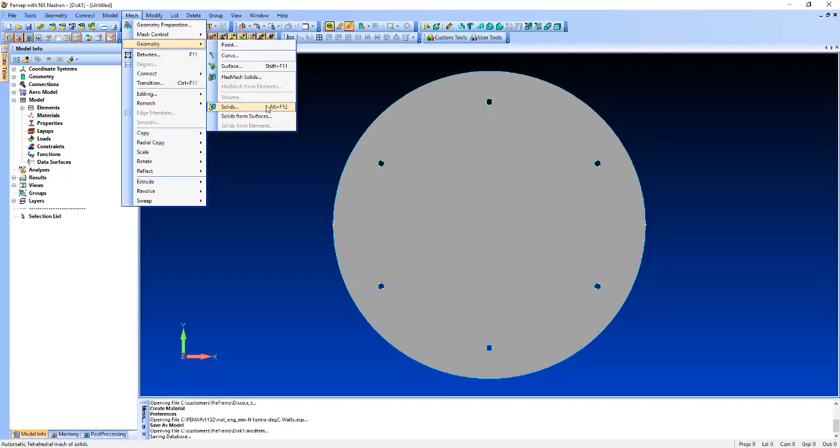First thing we need to do is just mesh this part. And let's just do mesh solids. I'm not sure what material. I'm just going to make it out of aluminum. You can obviously use whatever material you want. I'm going to tighten up the mesh sizing around the holes because we do have those little tiny holes.

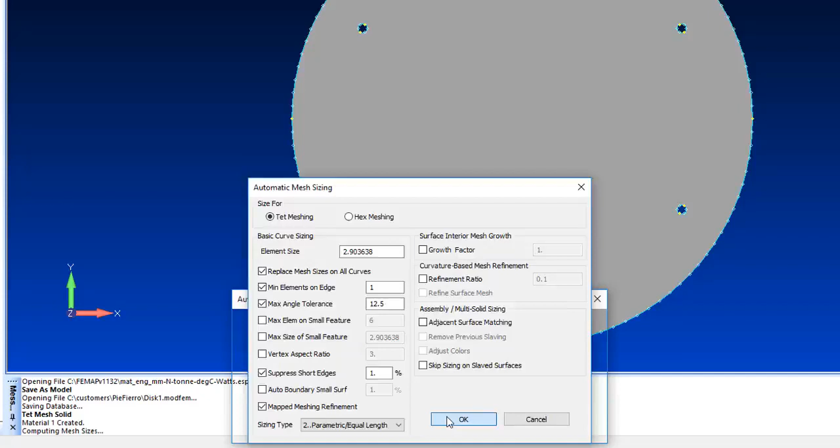Let's go down to 12.5. And this little thing here, we'll let it tighten up around the holes. So you can see now the mesh size is much tighter in there. We'll say OK. And our part is now meshed with a really nice tight mesh around the hole, so we will see the stress gradients as we want them.

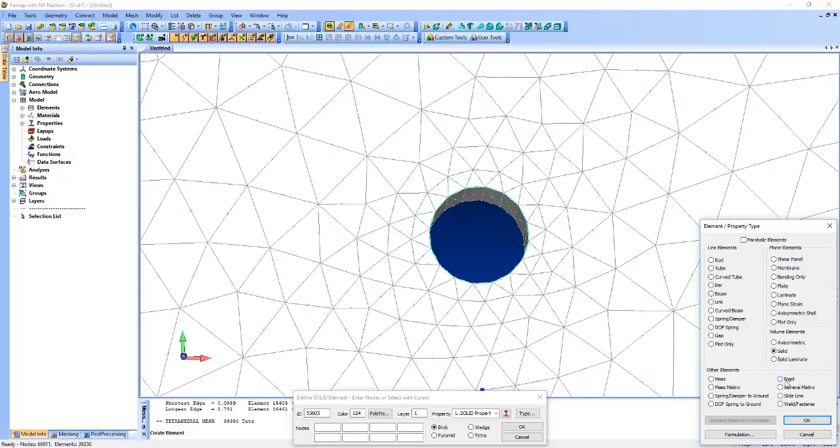Now the trick here is to create these rigid elements, and I'm just going to hit model element, which is Control E, and then change the type. We're calling it a rigid even though it isn't. It's very similar with the center node and all the connections. So we're going to go to this

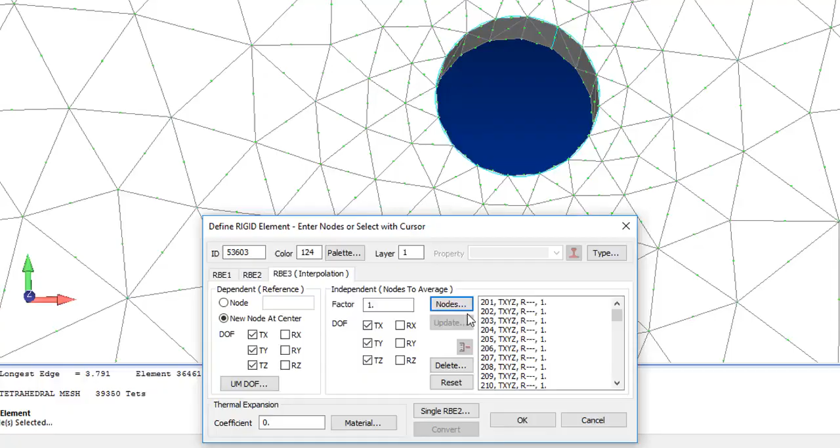RBE3 element. And since it's solids, there are no rotational degrees of freedom. We're just going to do the translational degrees of freedom. And to pick the nodes, I'm just going to pick the two halves of the hole and let Femap create that rigid element in there.

Now we're going to do the same thing on the other locations. So new node at center, nodes, method on surface. And let's do it here. And then we'll slide over here and do it on surface.

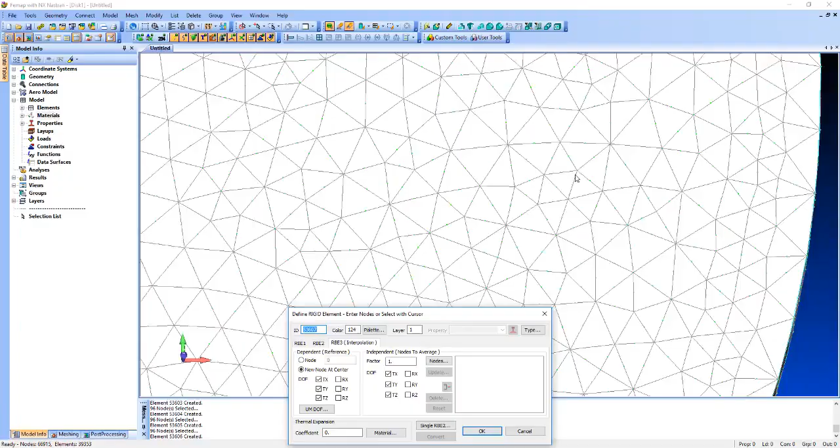We actually have an API that does this automatically. If I was going to make these all the time, I think I'd switch that over to making RBE3s, but just for this we'll go ahead and finish up doing it by hand, and then we'll go up to this one and we're going to pull on that hole up there, so we'll put one there too.

So nodes on surface, these are just making those little spiders. Okay, and here's the one we're going to load, this one in the positive Y direction, but we need the same thing there to apply the load.

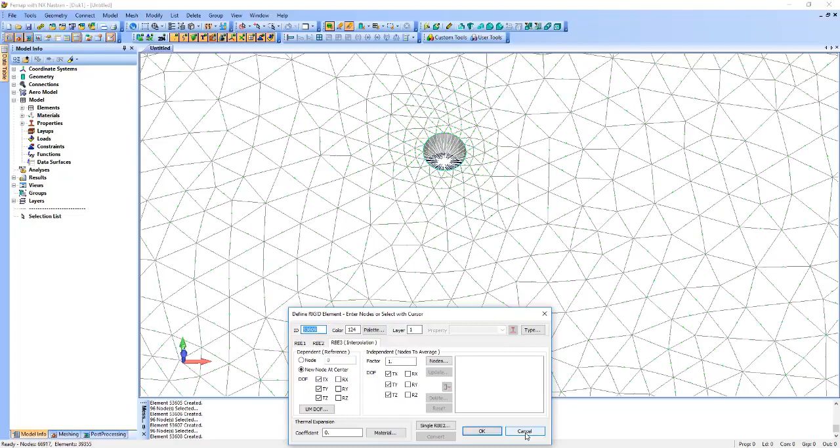Okay, so what we're going to do is just temporarily, I'm going to go over here to elements, by type, just turn off the solids, I'm going to turn off the geometry, so all I'm seeing now is those 6 RBE3 elements. So the first thing we want to do is hold them down, so I'm going to create a new constraint set, which is the fixed at 5 holes.

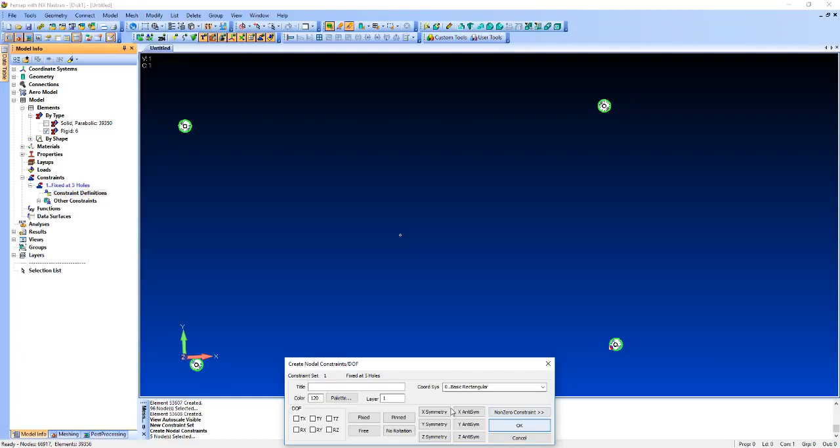And then what we'll do is let's open up that constraint set and say nodal, and we just want to go for that middle node. We can see it highlight in the middle, and we pick those 5. And again, there are only translational degrees of freedom, so we'll go those directions.

And now we need our load, so I'm going to come over here and create a load set. Actually, we want to do an enforced displacement, don't we? So let's do it that way. Let's do model constraint nodal, and this is kind of new in one of the most recent versions of Femap, but we can just put in enforced displacement as a constraint.

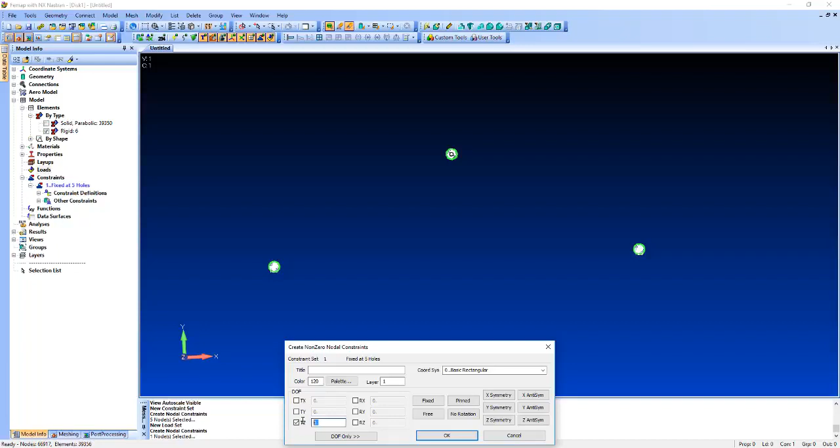So I'll pick that middle node there, and we have this non-zero. And let's just make this thing move a little bit in the Z. Say 0.01. So now our model is set up and ready to go. We just need to set up our Nastran run. So I'm going to say new, it already knows about the constraint set. There's really not much to do.

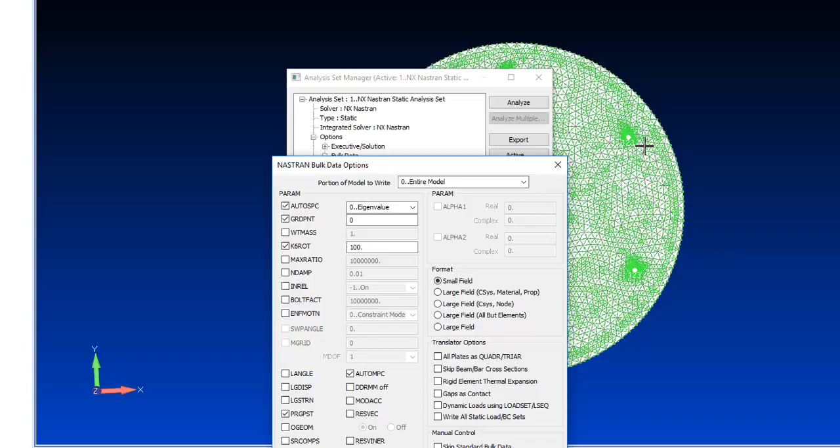Now one option here that's key is this auto MPC. What we've done here is we've got degrees of freedom constrained and connected and all these things. This just tells Nastran to auto sort out any dependencies and get everything right. And I think that ought to do it. So let's just save it, and then we'll hit analyze.

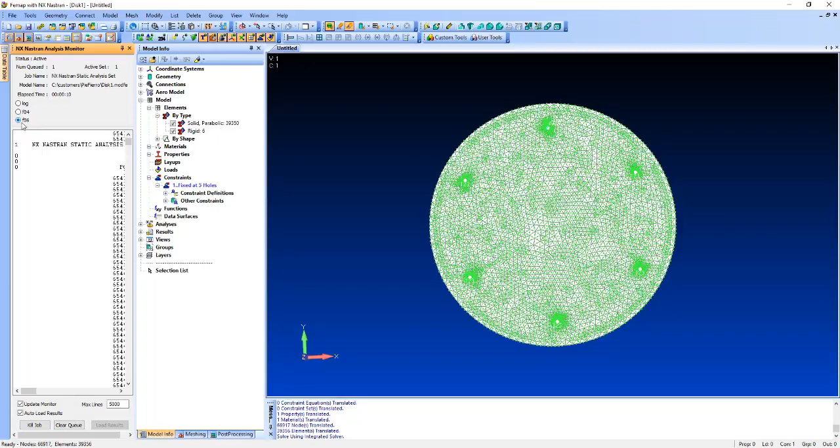So Nastran's going to run here. We should knock this out pretty quick. Still running. The rotational degrees of freedom, I could get rid of that message. We'll just let it fly. So now it's solving. It's already done reading the results.

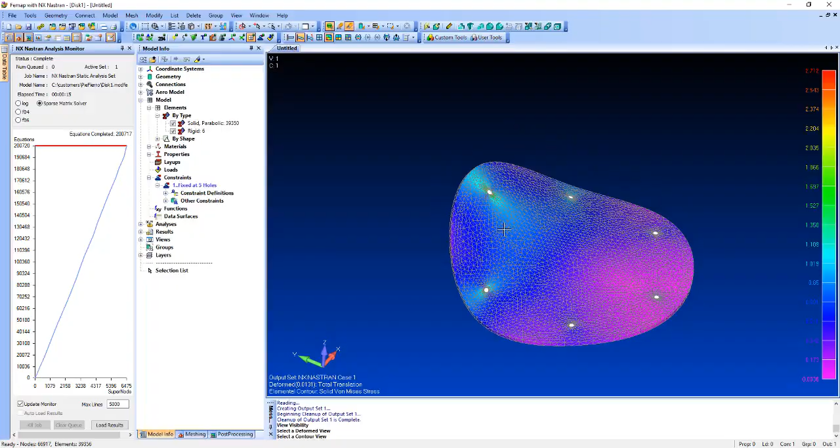I'm going to turn off everything but the elements just to clean up the display, get rid of nodes and stuff. And let's just take a look at deformed and stresses. And you'll see now you kind of get realistic stress concentrations around holes. I mean, that's kind of what you get without anything going really crazy, but that all seems to make sense to me.